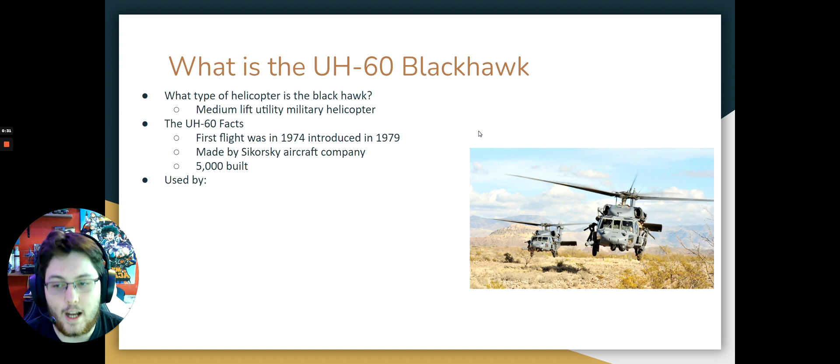Some facts about the UH-60: its first flight was in 1974, introduced in 1979. It's made by Sikorsky Aircraft Company, and there have been 5,000 built as of 2023. It's used by many nations, including the US, Japan, Korea, and more. It's used all over the globe.

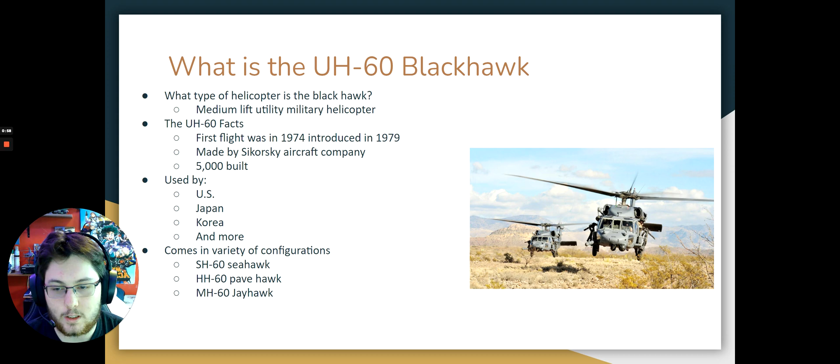You can get the UH-60 in many varieties, including the SH-60 Seahawk, used by the Navy, the HH-60 Pavehawk, used by the United States Air Force, and the MH-60 Jayhawk, used by the Coast Guard. We'll first start off with the UH-60 drivetrain, because that's what we'll be covering today.

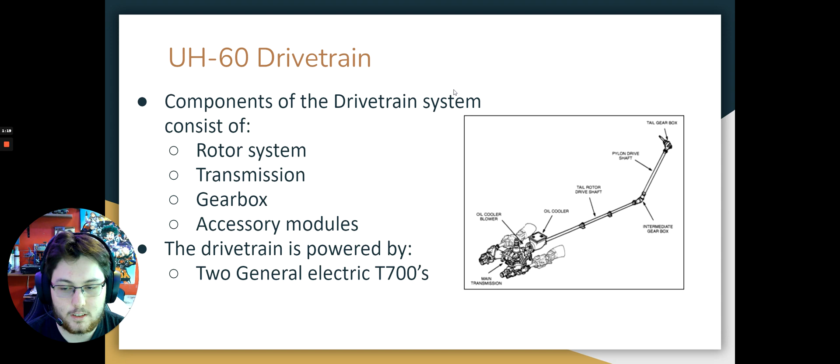Some components of the drivetrain consist of the rotor system, the transmission, the gearbox, and the accessory modules. The drivetrain is powered by two General Electric T700s, which make 1,600 shaft horsepower each.

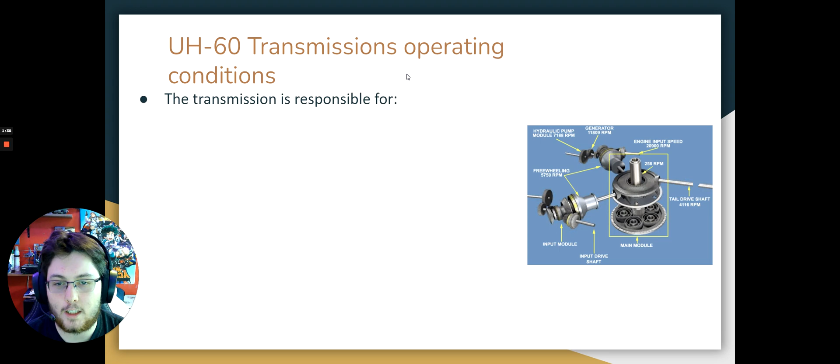We'll start off with the transmission system. The transmission system is responsible for carrying engine torque to the main rotors and tail rotor. The transmission consists of 5 modules, including one main module, which provides speed reduction from the input module to the main rotor and tail drive shaft.

There are also 2 input modules, which connect the main module to the engines, and 2 accessory modules. These contain rotor speed sensors and low oil pressure switches.

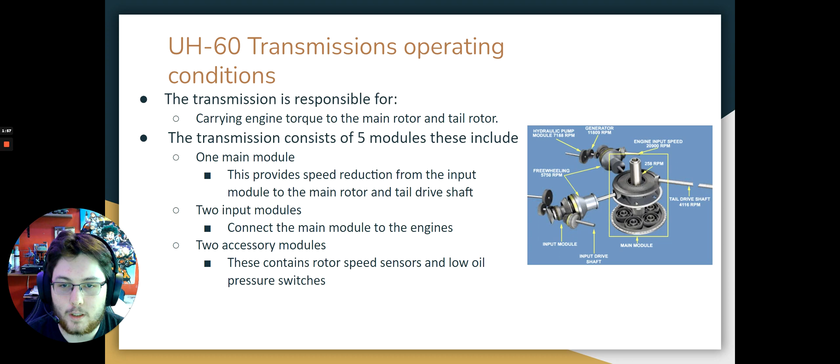To continue on, the transmission has monitoring systems. These systems have oil pressure and oil temperature indicators, including indicators on the caution/advisory panel that will warn the pilot when oil pressure is low and oil temperature is high. The transmission system also has a chip detector in each module.

A chip detector detects metal particles in the modules. Also, the transmission can operate for 30 minutes with no oil before failure. The recommendation for this is to land before the 30 minutes is up.

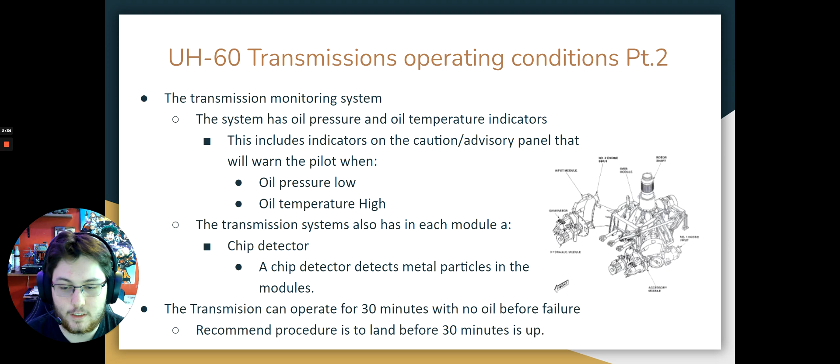Next, we're on to the rotor system. The UH-60 rotor system consists of 4 main blades, 4 tail blades, a hub flight control, and a vibration absorber. The main rotor spins at 258 RPMs at 100% throttle.

The tail rotor spins at 1,190 RPMs. The blade consists of a leading edge made of titanium abrasion strips and a trailing edge made of a combination of graphite and fiberglass. Also, to add on to the main rotor spin, they take that down from 20,000 RPMs from the engines down to 258 RPMs in the main rotor.

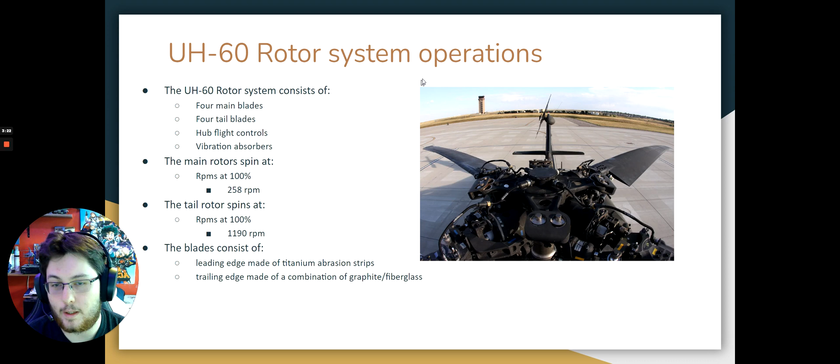Also, the UH rotors can be folded at the hub. This is for better storage and for a small profile for shipping on ships, aircraft, etc.

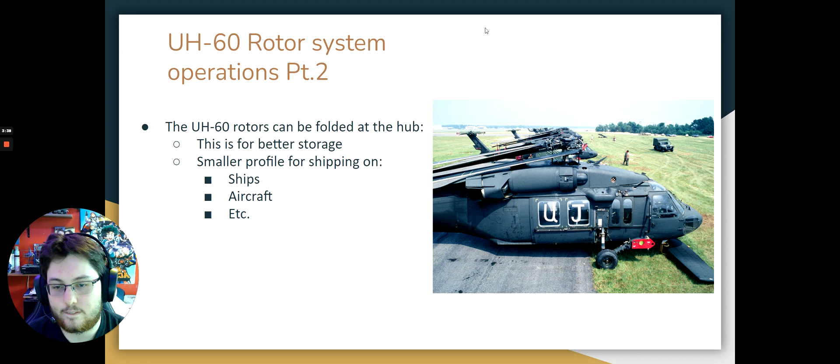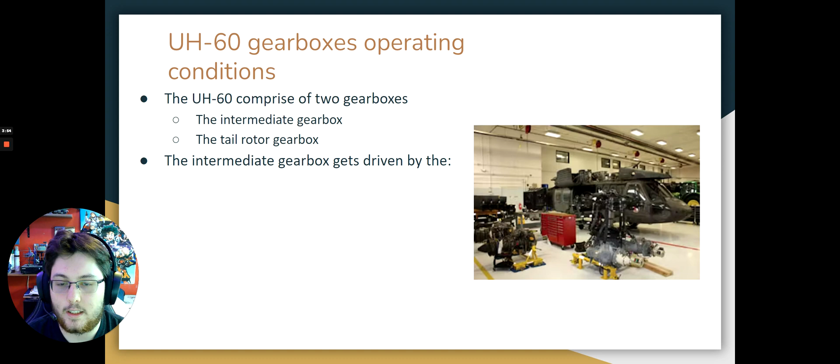Now we're on to the gearbox of the UH-60. The UH-60 gearbox comprises 2 gearboxes, the intermediate gearbox and the tail rotor gearbox. The intermediate gearbox gets driven by a tail drive shaft from the transmission.

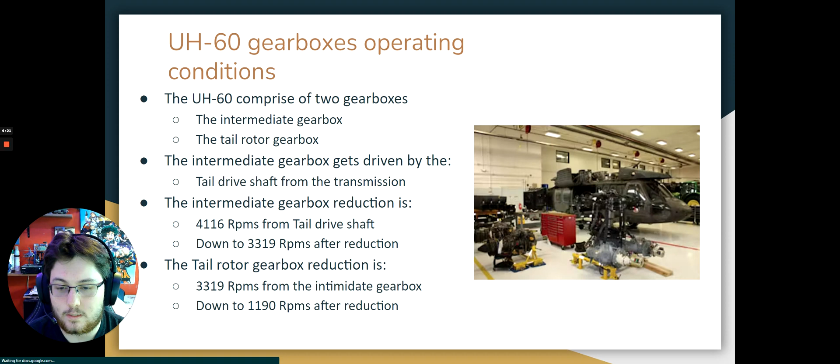The intermediate gearbox reduction is 4,116 RPMs from the tail drive shaft down to 3,319 RPMs after reduction. The tail rotor gearbox reduction is 3,319 RPMs from the intermediate gearbox down to 1,190 RPMs after reduction. To continue with the gearbox, here's some nice diagrams of the gearbox.

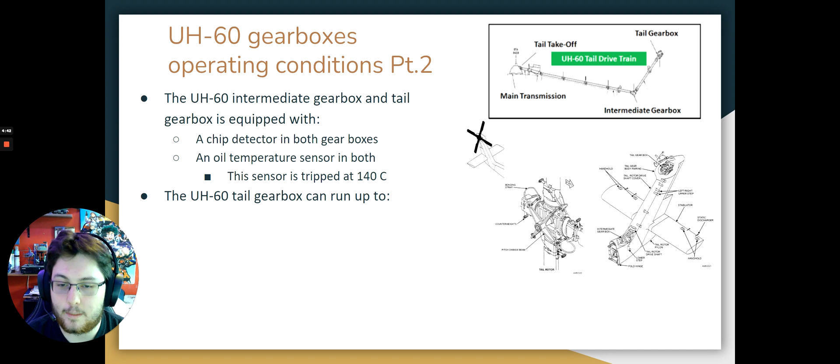The UH-60 intermediate gearbox and tail gearbox are each equipped with a chip detector and an oil temperature sensor. This sensor is tripped at 140 degrees Celsius. The UH-60 tail gearbox can run up to 30 minutes without oil, and then this will lead to failure. The recommendation for this is to land.

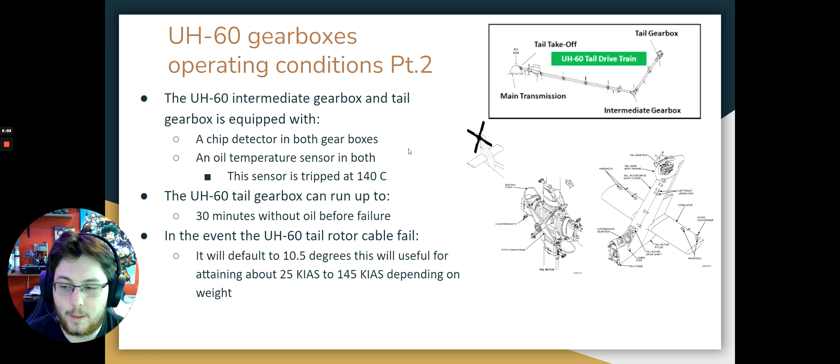In the event of a UH-60 tail rotor cable failure, the tail rotor will default to 10.5 degrees. This will be useful for attaining about 25 to 145 knots, depending on the weight of the Black Hawk.